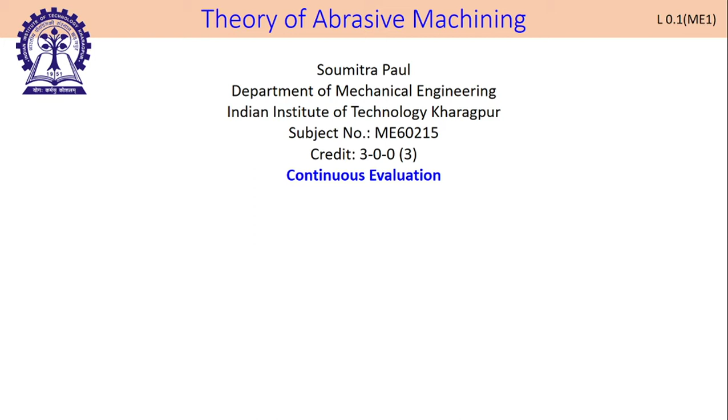The credit of this subject is 3-0-0, that means we would have 3 lectures, with no laboratory attached to it. I will explain the laboratory aspect later. There is no tutorial hour given, but because we are primarily in virtual or online mode, there would be tutorials, and this semester it would be continuous evaluation. Typically we have a mid-semester exam carrying 30 marks, end semester exam carrying 50 marks, and class tests or teachers' assessment carrying 20 marks, but this time it would be continuous evaluation. I'll explain how we are going to do that continuous evaluation after some time.

So what is this subject not on? This subject is not on abrasive jet machining, not on ultrasonic machining where abrasives are used, and not on abrasive water jet machining where abrasives are used. By Theory of Abrasive Machining, we will talk about the underlying theory in grinding. Grinding is typically not covered to a great extent in most colleges at the undergraduate level. So some part of the technology would be covered, but the focus of this subject is not technology, it is primarily theory. So technology you have to learn on your own to some extent, and the theory part would be covered.

Some basic technologies would be covered to start the subject, but later on we will primarily emphasize the underlying theory of grinding. All videos would be recorded, or may be recorded. At this moment I am recording the video. I do not know how much time it is going to take, so that is one drawback. If it takes a huge amount of time, I do not know whether I can continue recording videos or not.

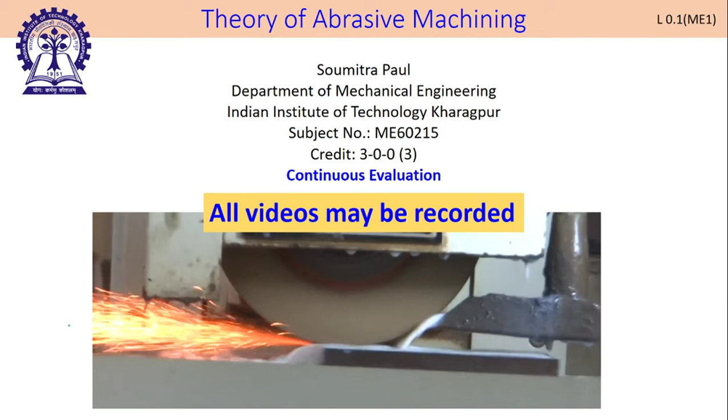Now, before going into the subject of Theory of Abrasive Machining, let us talk about manufacturing science and engineering. Have you interacted with any of the professors since joining the course? Can I get a response from you? Hello?

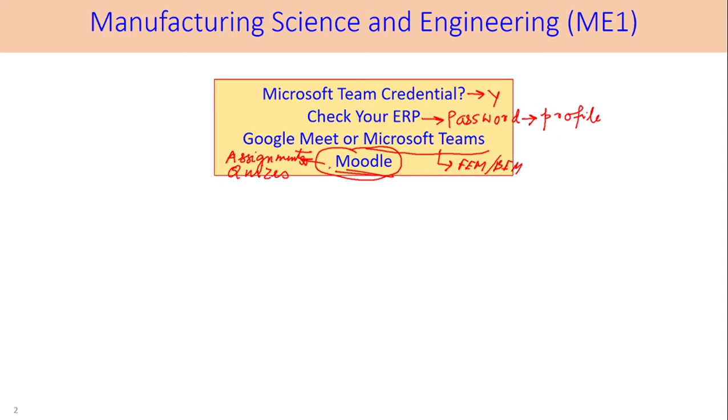So you people have received Microsoft Team credentials, which is very good. All of you have created your password, or password was provided to you. And most important thing is that Google Meet, Microsoft Team - already the FEM BEM class has been taken, so you more or less know how to use it. Now let us go to the next thing.

Next thing is timetable. Let me do something - these are no longer required, so let us remove them, they will interfere with my further thing. Fine, so timetable: Monday 8 to 9:55, Tuesday 12 to 12:55, Saturday 9 to 10:30.

Now you might think that just now I have told it is a 3-hour class. So you have 3 hours over here, 3 hours over here, but this is a shorter semester. Because it is a shorter semester, we have extra classes on Saturday, and this is well reflected in your timetable. Have you received your timetable?

Yes sir, it is, but Saturday timetable is not mentioned there.

Has Professor Vikranth Racherla mentioned the timetable for his class? Yes sir, he has given it, and he's also given 1 hour duration on Saturday, but his timetable is also not mentioned. Okay, fine, so I'll come to that.

I'll explain everything gradually. Today's lecture is very, very important for your logistics, so please stay with me. So timetable is done - this timetable is only for this particular course.

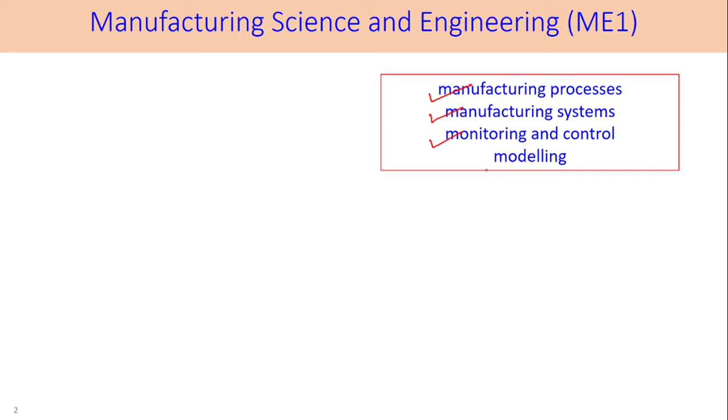It is an MTech subject, so we will be covering a lot of aspects of manufacturing processes and manufacturing systems. Both manufacturing process and systems require monitoring and control - that aspect would be covered, and numerical and analytical modeling of manufacturing processes and systems would be covered. So this is the broad outline of our course - not theory of abrasive machining, but your MTech course on Manufacturing Science and Engineering.

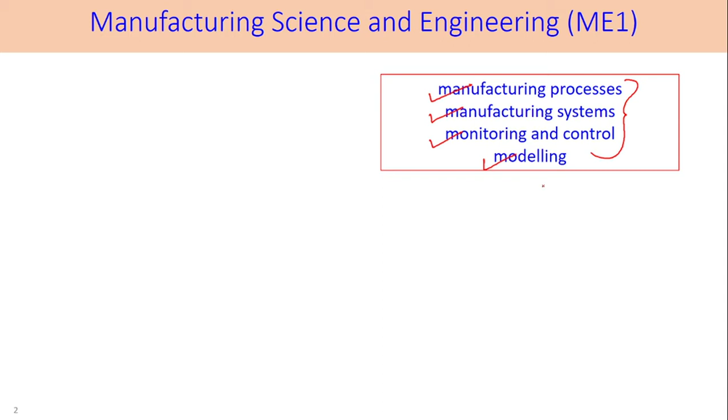In the first semester, what would you be doing? This is your first semester - there is one core course, that is Theory of Machining, and you have 4 electives. I believe a lot of electives are running, out of which you have to select 4. You have Advanced Manufacturing Lab 1 and Seminar 1.

Now, one thing you must note down very carefully: Professor Partha Saha is your course in-charge. I am not the course in-charge.

I am teacher of theory of abrasive machining, which is an elective course. Professor Partha Saha is course in charge. He will tell you whether Advanced Manufacturing Lab would run now or not, and how it would run. Though I am a teacher in Advanced Manufacturing Lab 1, Professor Partha Saha will interact with you, or maybe both of us will interact when clarity is given to us from the institute side. So I cannot really talk about lab or seminar classes. Possibly Professor Partha Saha would be knowing. What I can clearly tell is that theory of machining would be running, and all 4 electives as per your choice would be running.

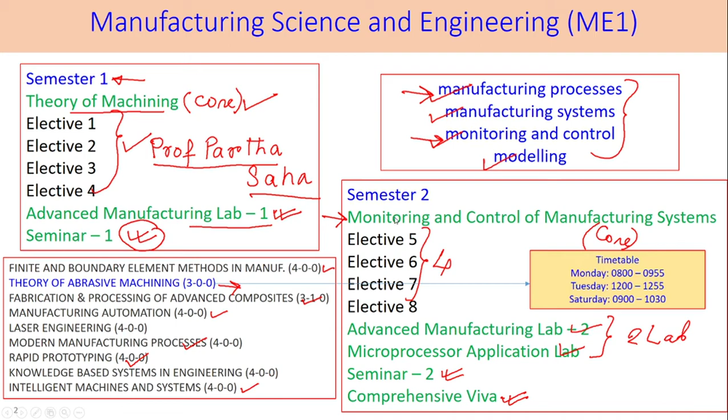No, sir. You people can unmute yourself and tell me. No, sir, no confusions. Were you able to see my slides while I was delivering it? Yes, sir. Okay. Yes, sir.

Okay, fine. Just a minute. So Ritesh has joined. Sumita Singh has joined. Sarjil I have spoken to. Muralidhar I have spoken to. Gajanan I have spoken to. So I have not spoken to 3 individuals.

Rohit, can you unmute yourself, please? Yes, sir. What kind of data are you using, through mobile? Are you using mobile or laptop? Laptop. Sorry. Laptop. And the data connection is through hotspot. Yes, sir. Is my voice clarity and audio and video clarity good at your end? Yes, sir. Both are good. Okay. Thank you so much.

You mute yourself. Ritesh, yes sir. Where from are you joining us? Cell phone, sir. Mobile phone. No, where are you located? In which town, city, village, state? Dewas, MP, Madhya Pradesh. So you are using your mobile hotspot to join us? Yes, sir. Achha. Are you using your laptop or are you seeing this lecture on the mobile?

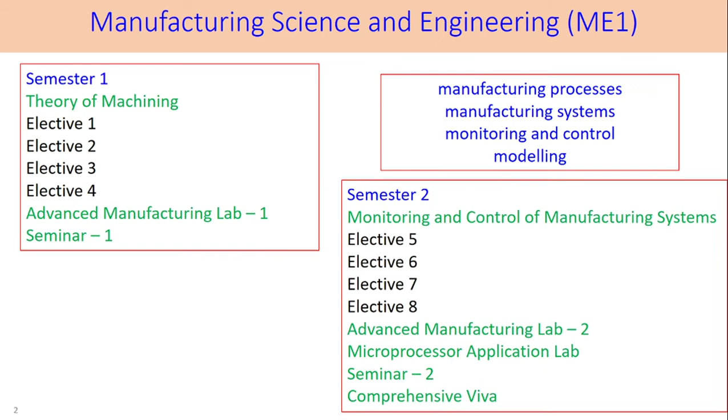So now let us come this way. I'll cover once again in greater detail manufacturing classification. We have...

Primary manufacturing. You people can unmute yourself. We have secondary manufacturing. We have tertiary manufacturing, and a very new thing has come up, which is additive manufacturing. Some of us would like to combine tertiary manufacturing and additive manufacturing together, some of the books or lecture notes, but I have kept it aside for its importance, because its current importance is very good.

Any one of you, can you tell me what are the primary manufacturing processes? Hello? Sir, casting. Yes, please come forward, leave aside your shyness and please respond. Sir, casting.

Welding. Not welding, welding is not a primary manufacturing process. And you also have forming. Rolling. Forming. So out of forming, there are two kinds of forming.

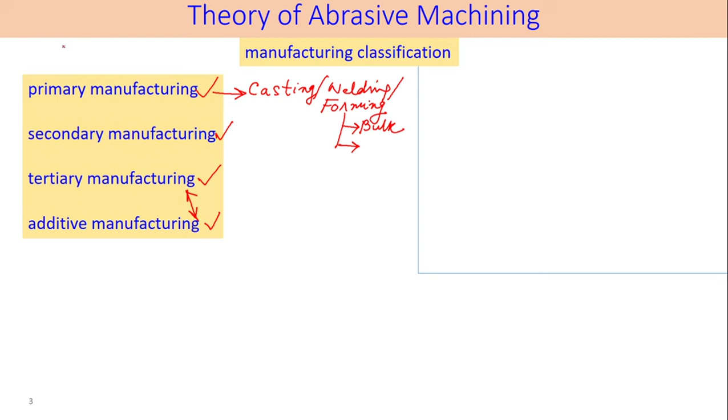So bulk forming processes would have all that you are mentioning: rolling, extrusion, and all of them. And there is one more process which is sheet metal forming. My handwriting is rather bad because I am not used to writing in this particular method, so I have to request you to excuse me.

So this is the situation. Even sheet metal forming, the spelling looks horrible. So let me rewrite it. Let me see whether I can once again find the same place to write or not. So where am I? God.

Okay, now for bulk forming, whatever I have written here, rolling and extrusion, there is another kind of classification. Can any one of you tell me what is that classification?

Hot rolling and cold rolling. Come again. Hot rolling, cold rolling. Hot rolling, cold rolling is a kind of rolling process, but you are very near to it. So one is called hot working process, another one is called cold working process.

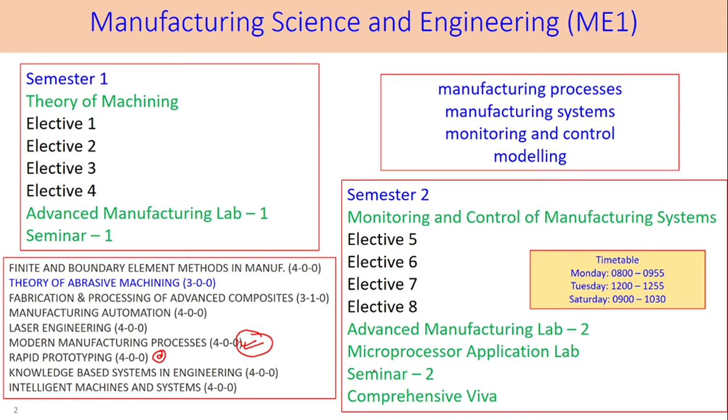It is primarily non-traditional manufacturing, but within modern manufacturing process, a part of additive manufacturing would be covered. We also have an elective on additive manufacturing, but we do not call it that. We call it rapid prototyping. So rapid prototyping is being offered, those who are interested can think about that.

Ours is secondary manufacturing process using conventional material removal processes. Now, what is the difference between conventional material removal processes and non-traditional material removal processes? You can give me a physics-based explanation, or you can give me an example-based one. So for conventional, what are the examples? And for non-traditional, what are the examples? Can you give me those examples?

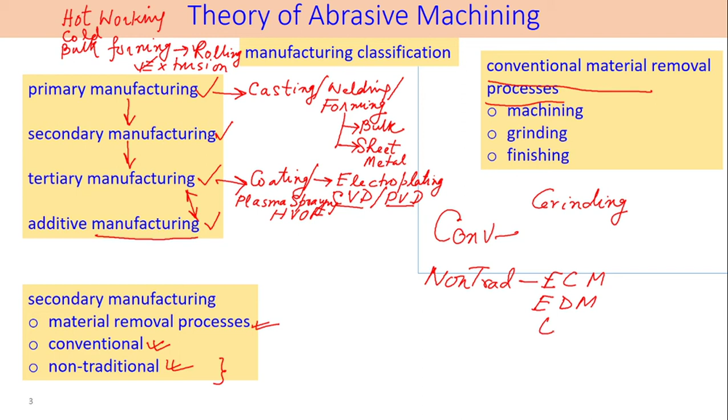Sir, in conventional we have grinding, and in non-traditional we may have ECM operation - electrochemical machining. EDM, ultrasonic machining (USM), abrasive jet machining, water jet machining, abrasive water jet machining, electron beam machining, laser beam machining (LBM), ion beam machining, chemical machining, photochemical machining, and so on. So a lot of processes are there.

In conventional, what are the processes other than grinding? We have turning, milling, drilling - all these processes. So our things are restricted here.

Now there is another group of processes which are finishing processes - we'll discuss that after some time. This is where theory of abrasive machining belongs. It is part of secondary manufacturing process. It is part of conventional material removal process.

What is the difference between conventional material removal and non-traditional material removal from a physics base? I did not explain that. What else I did not explain? This finishing thing also I did not explain. Now from physics base, can any one of you tell me what is the difference between conventional and non-traditional processes?

Sir, in conventional machining, tool and workpiece are in direct contact. So in conventional machining, you have a cutting tool and a workpiece in direct contact, and the cutting tool applies a mechanical force. As it applies this force, material failure occurs. If the material is ductile, shear failure occurs and the extra material comes out as a chip.

As far as non-traditional manufacturing is concerned, tool and workpiece may not be in contact. In electrochemical machining, there is no physical contact. In EDM, there is no physical contact. In water jet machining, water is your cutting tool, which is in physical contact. In EBM, LBM, there is no tool itself - it is electron beam or laser beam or ion beam that is removing material. In abrasive jet machining, it is a jet of abrasive.

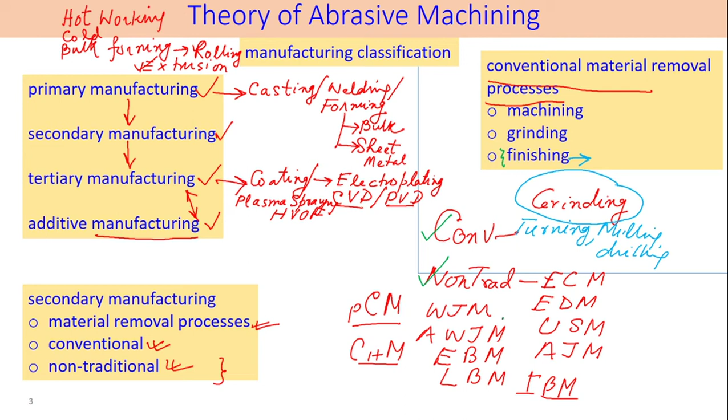So there are a lot of physics-based differences, but one very important thing in conventional machining is that you have a physical tool which applies force, leading to removal of extra material because of ductile or shear failure of the work material, leading to chip formation. Most of the time the cutting tool has to be hard at room temperature and hard even at elevated temperature as compared to the workpiece. So this is the background material - you have all learned this in undergraduate.

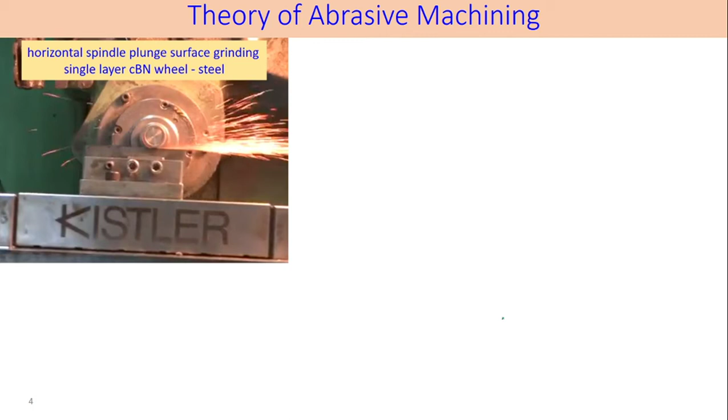We are simply recapitulating. Now let us come to the flavor of the subject. So this is two of the grinding processes. Let me once again enable my pen. This is one particular process, this is another process. Both of them are surface grinding processes.

Other than surface grinding, you have cylindrical grinding. All these things we will be covering with schematic diagrams. Cylindrical grinding can be external or it can be internal. You also have another kind of cylindrical process called centerless grinding.

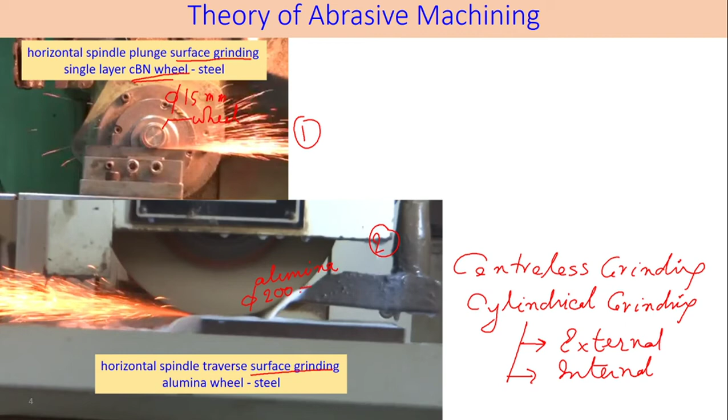I am not going into other details, but let us mention where it is. Here we are using a small wheel, as you can see, having a diameter of 15 millimeters only. This is an alumina wheel, that is aluminum oxide wheel, having a diameter of 200 millimeters. Most of the time surface grinding is done with large diameter wheels, but sometimes small diameter wheels are also used for testing their performance. So these are the two examples that I have given.

Now, grinding process - what is the purpose? If I ask you this question, I believe all of you would say grinding is a finishing process, required to improve the surface finish. So, is there any other purpose of grinding? Can any one of you tell me?

Can any one of you tell me what are the other requirements of grinding process?

Rohit, yes, you have unmuted yourself. Hello Rohit. Yes sir. What is the other purpose of grinding?

If you do not know, anybody else who knows what is the other purpose of grinding. All of you would agree that grinding is undertaken as a finishing process to improve surface finish. What about any other purpose?

Generation of powder in powder metallurgy. That is a secondary application, not the primary purpose. When you are doing grinding operation, powders can be generated. However, for powder metallurgy, powders are generated commercially using something else.

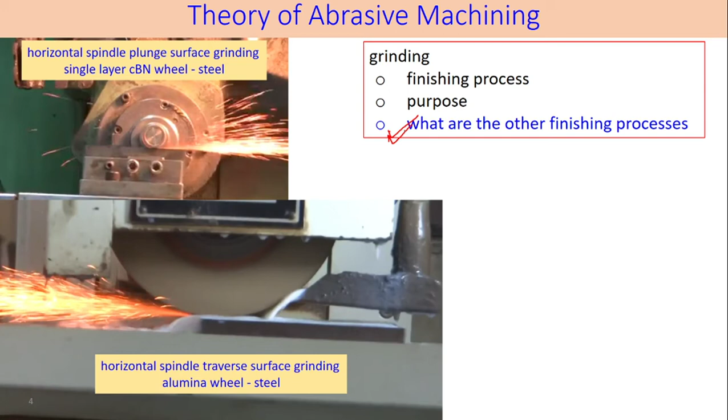But this is a very short lecture, it is only for, till now I have taken around 45 minutes. So within 1 hour I cannot cover the whole technology part of it. For that you have to follow these books.

So one is DeGarmo's Materials and Processes in Manufacturing. This is not for theory of abrasive machining. Even for theory of machining, which is your core subject, this kind of books would be useful. This is a recommendation, I am not saying you have to have this.

There are other books. Whatever you use, you have to upgrade yourself to a level from the technology aspect of it. That means in turning, what are the process parameters, how turning is carried out, what kind of cutting tool is used, what is boring, what is the difference between using a boring tool and boring bar. Technology aspect should be very clear to you.

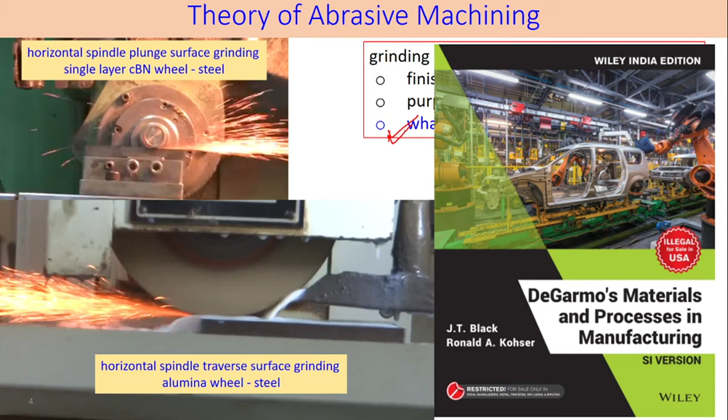This is one book. Another book is this one. I know this particular book by this professor's name, DeGarmo's book. When I was doing my undergraduate, I also used this particular book. This is a very good book for learning the technology.

This is a recent addition, recent meaning last 20 years. So Kalpakjian - this is not Kalpakian, it is Kalpakjian. I believe Kalpakjian is still alive, but DeGarmo is not.

So if you have access to this book, physical copies, electronic copies, very good. If you do not have, talk to your friends, current friends, past friends, if they can share with you, or else if you have some other book, try to use it.

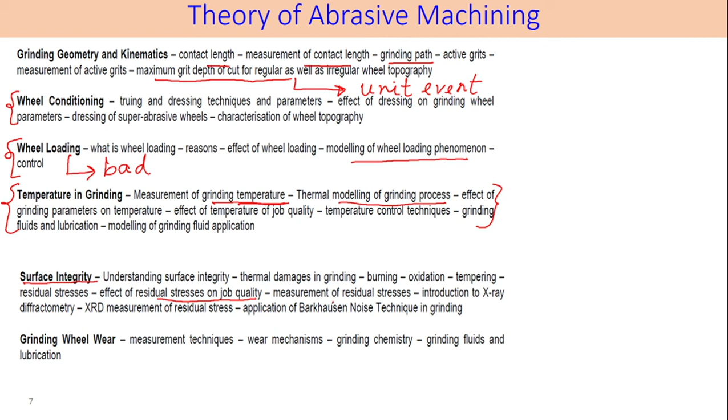Then after surface integrity we will follow grinding wheel wear, something like tool life and tool wear in turning, but this is for grinding wheel. There would also be some special topics. Not all of them I would complete - some of them would be on self-study mode.

For example, ductile regime grinding I will cover, diamond turning I will cover, monolayer super abrasive wheels I will cover, but the rest of them I will not cover. High efficiency deep grinding I will cover when I am covering temperature in grinding. So this would be the distribution.

Now which book to follow? This is the book, Grinding Technology by Stephen Malkin. So this particular book you have to follow. This is a very, very expensive book - chances are you do not have it. So try to get a digital copy.

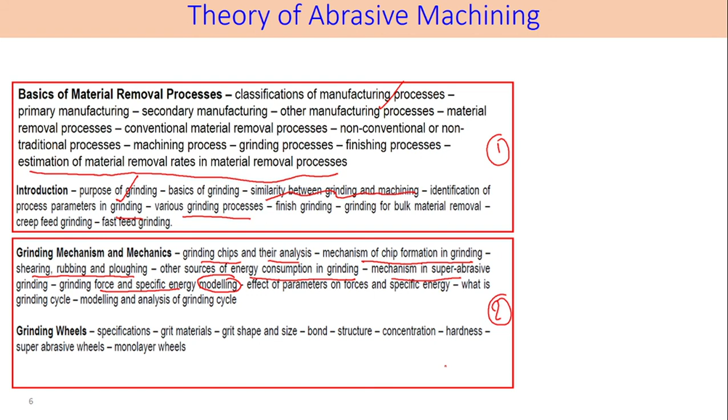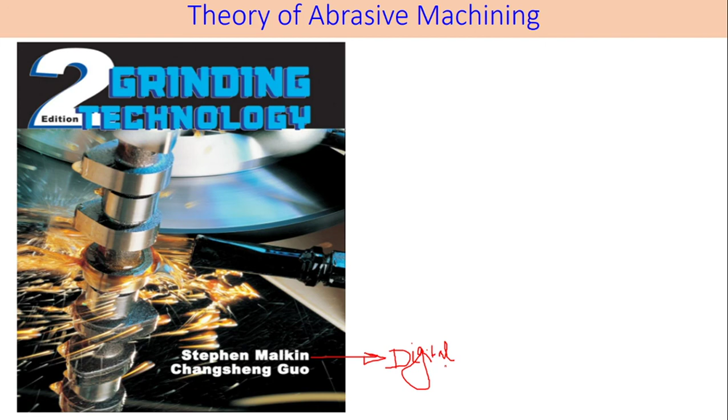In the next class I will possibly cover these in much more detail, or at least I think I have shared this course content with you. So this is the book you have to follow. However, class notes would also be very good. I think it would be a good idea to take online class notes if I am taking classes in this particular method, that is, online classes.

So one by one, Gajanan, was there any problem in this delivery method, network issues, nothing else? No sir. Gajanan, whatever you are using, your audio quality is not bad, but your audio is very feeble. So if you are using a laptop, please set your mic volume appropriately. If you are using a mobile, possibly the volume during the online call has to be increased.

Durganand, what is your feedback? Network issues? It is very well. Fine, very good. See, if it is very good, credit goes to you. We are in IIT, we are using a wired network. I am not on Wi-Fi, so I expect that my connection would be good.

Rohit? Yes sir, I think your connection is not, I do not know. Are you getting my voice and screen share nicely? Yes sir. Okay, very good.

Now next one is Ritesh. How are you Ritesh, is it good from your side? Yes sir, it's fine. Singh, I do not recall your first name. Next time please join the class with your own Gmail. So Singh, is it good from your side? Yes sir. Okay, Muralidhar?